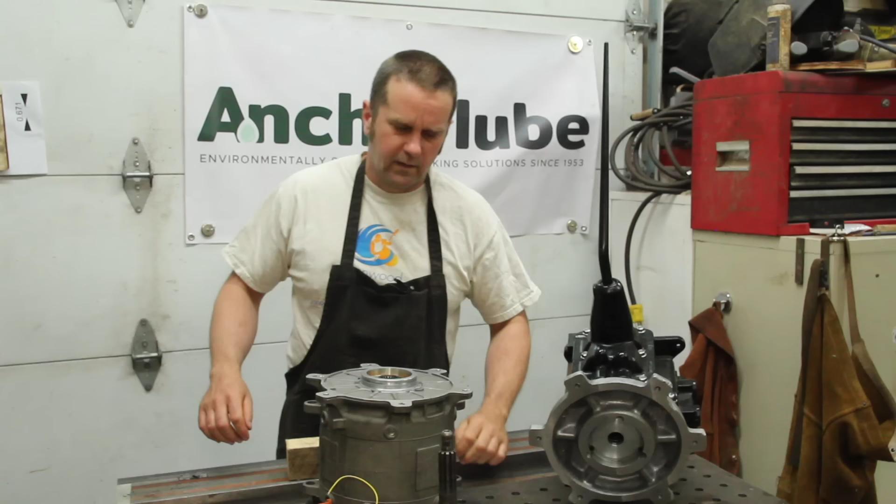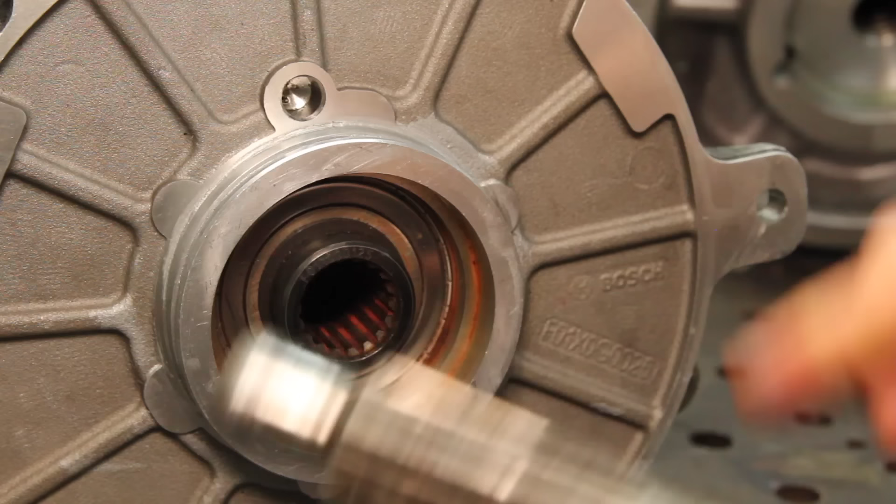And we are back working on attaching this electric smart car motor to that transmission from a 1956 Jeep CJ5. Last time I made the adapter plate. Today we're going to work on the input shaft. I need to make the input shaft fit the spline on the motor.

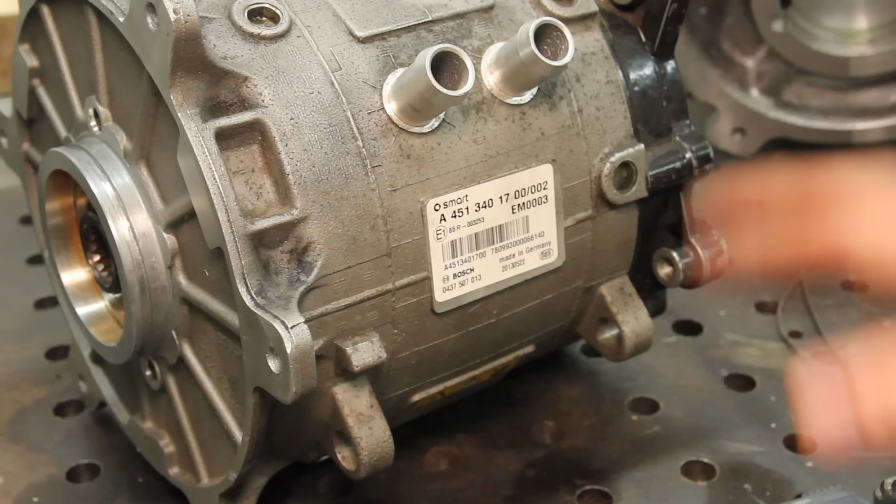It's close. This is a Bosch SMG 180-120. It's a kind of off-the-shelf motor that was used in a bunch of electric vehicles. Luckily, Bosch's marketing material specifies what this spline is. It's a DIN 5480-N 26 by 1.25 by 18 by 9H.

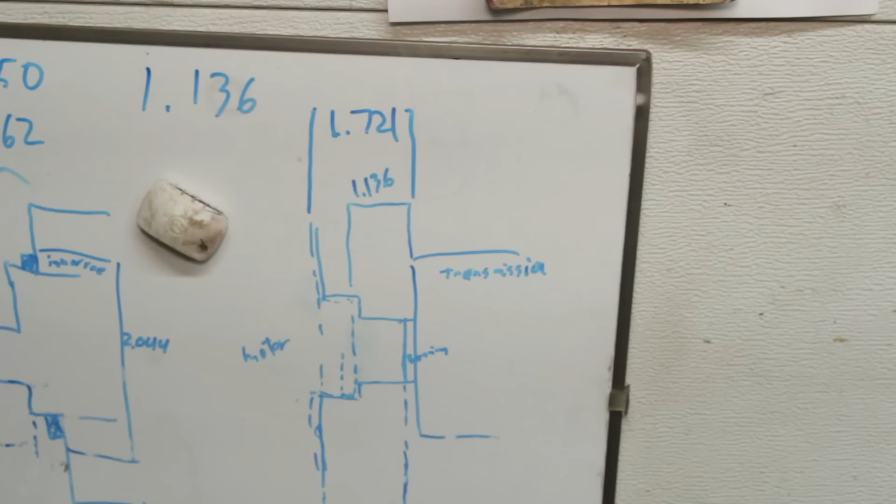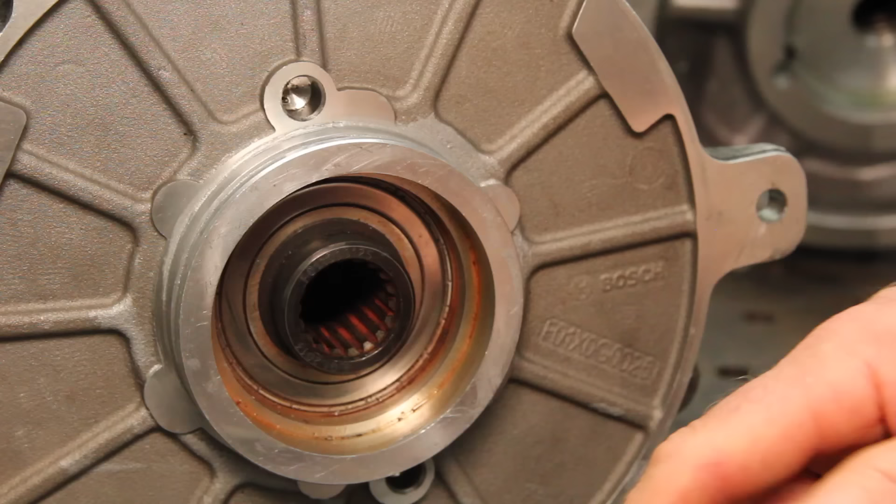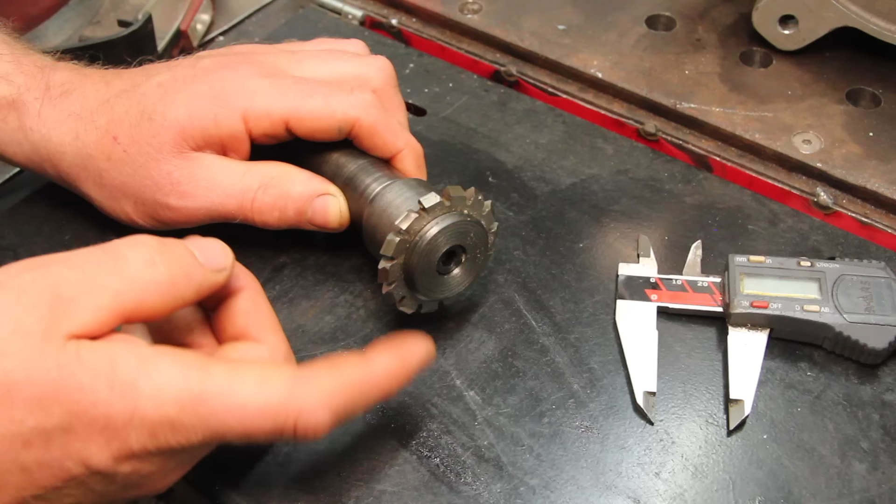I spent a while looking at the DIN 5480 standard, and what I found out was the N means Nabe, which is a hub or internal spline. That one's obvious. 26 is the reference diameter. 1.25 is the module, basically the size of the tooth. 18 is the spline count. I was able to source a 1.25 module, 18 tooth, 30 degree involute spline cutter straight from China, so at least I've got that taken care of.

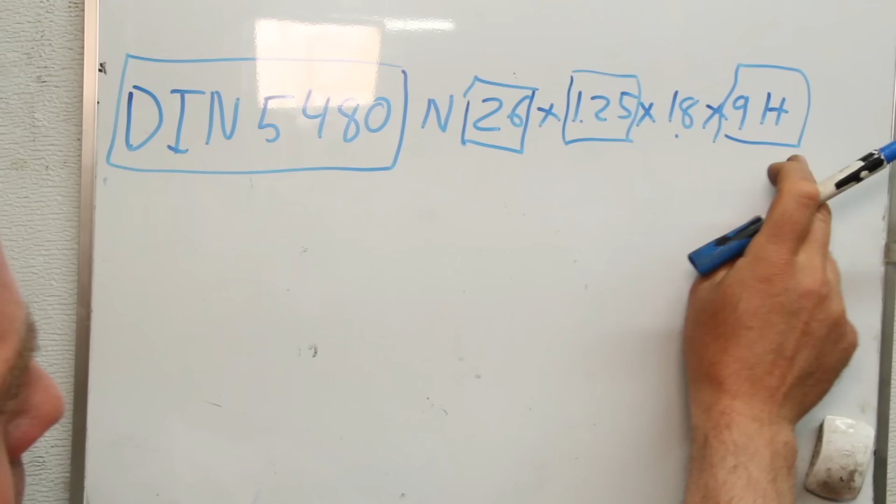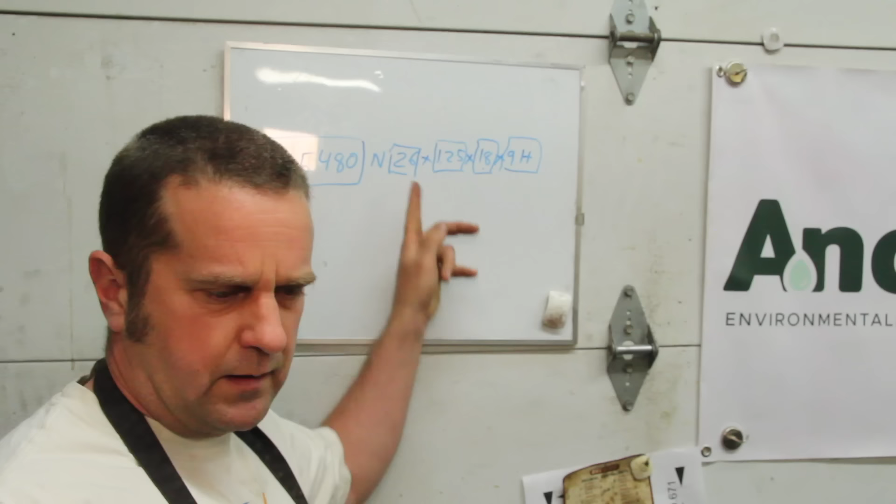And 9H is the tolerance or fit class. This one basically means we're going for sort of a line-on-line, very tight tolerance on it. But this one, I'm just going to read. DIN 5480 was structured to permit easy slip fitting of components, such as, for instance, ball or roller bearings. This condition is met by making the reference diameter equal to the bore of the bearing and then modifying the profiles of the teeth of the hub and shaft accordingly.

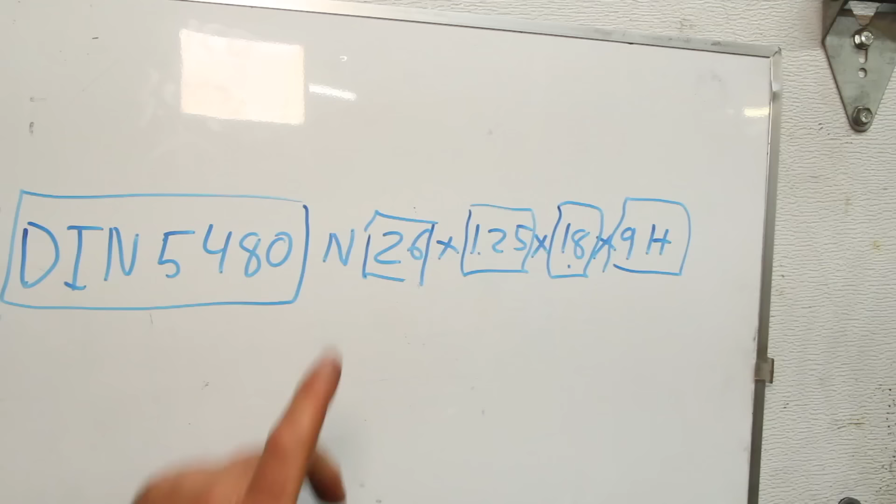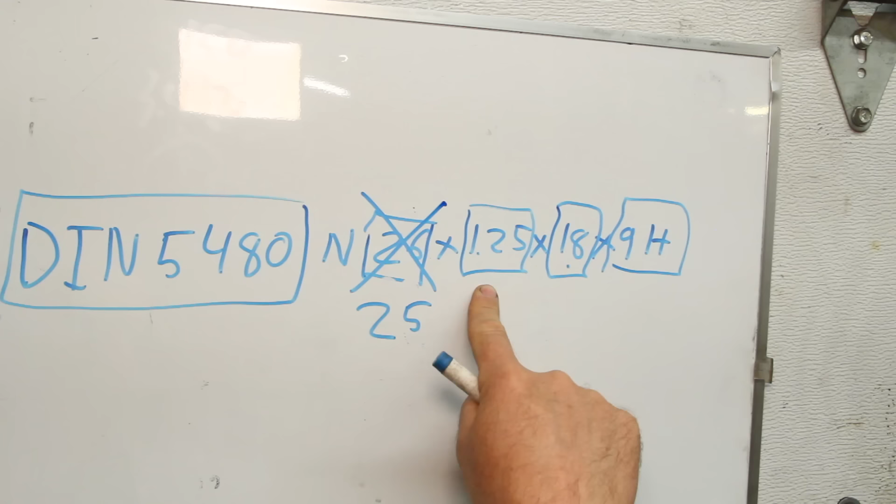Reference diameter is not the major or minor diameter of the spline. Really? On top of that, this is wrong. This is 25. If you look up a DIN 5480 spline chart for an 18-tooth 1.25 module spline, it's a reference diameter of 25 millimeters. So we're going to do what we always do, which is take some measurements, make a test piece, see how it fits, and adjust accordingly.

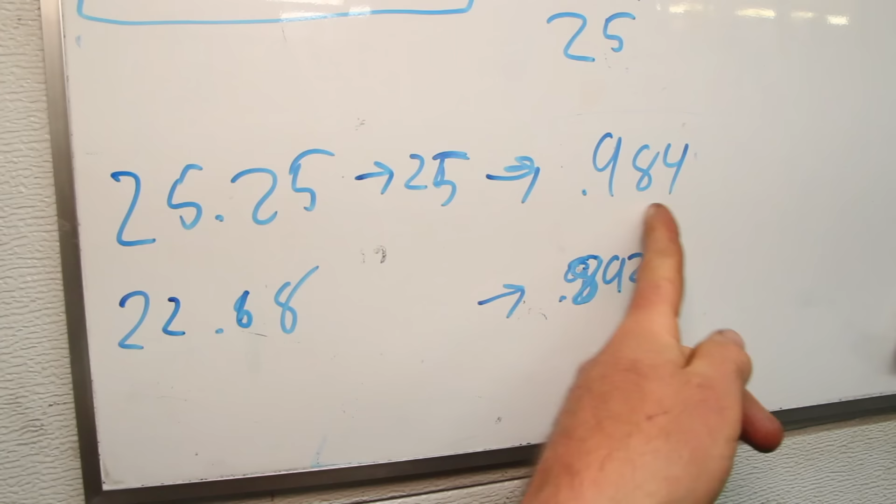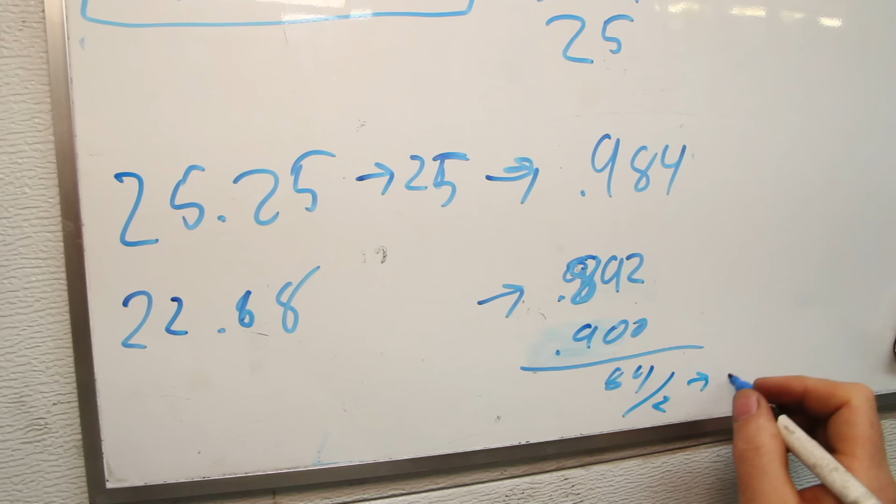Came up with a major diameter of 25.25 millimeters. For clearance, we'll call that 25 millimeters. That gives us 984 thousandths, because all my tools are in inches. Deal with it. Minor diameter, 22.68, 892 thousandths. We want a little bit of clearance on that, so let's call it 900. Tooth depth of 42. Seems like a good answer.

You know, it happens to me more than I care to admit that I take a roughing pass or even just an initial pass and hit the dimension exactly. It's better to be lucky than good.

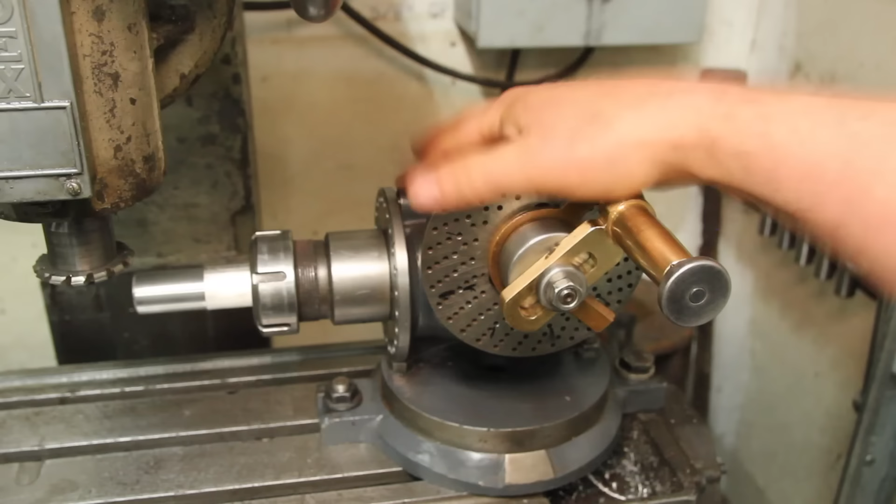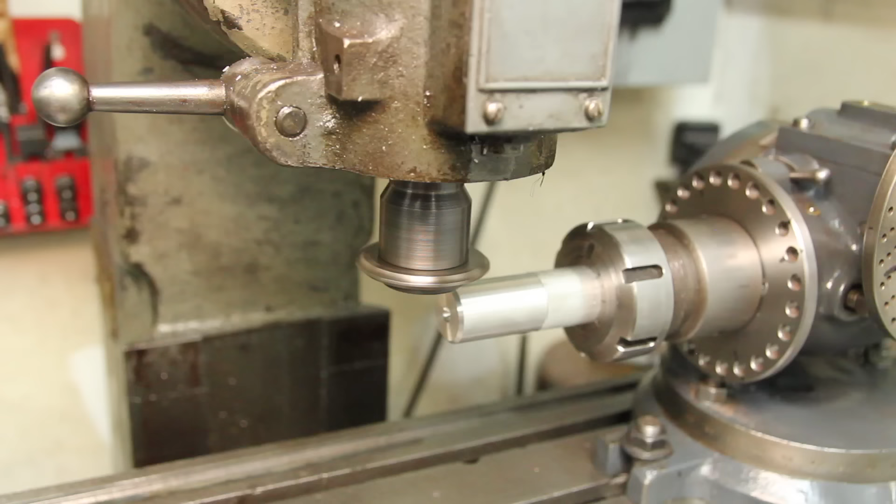I've got my dividing head all set up, clocked in vertically and side to side. Set up for 18 divisions. It'll be 2 turns and 6 holes on a 27-hole plate. I'm going to come down, touch off my cutter, then move halfway down and start cutting splines.

At the end of the last video I did on this project, I answered a few questions that I knew would come up, and some people asked them anyway. Maybe if I do it at the beginning this time, people won't wander off before they learn something. The most common one seems to be, why are you putting a transmission in an electric vehicle?

EVs don't have transmissions. The reality is most production EVs have a single-speed gearbox, a gear reduction usually between 8 and 10 to 1. I need a gear reduction, and it turns out I have one in the form of a transmission that's made to mate up with the rest of the drivetrain in this vehicle. This is a pretty well-proven way of doing an EV conversion. People have been doing this for a long time. I also plan on using this Jeep in a variety of terrain, so having the option of different gearing will be a positive.

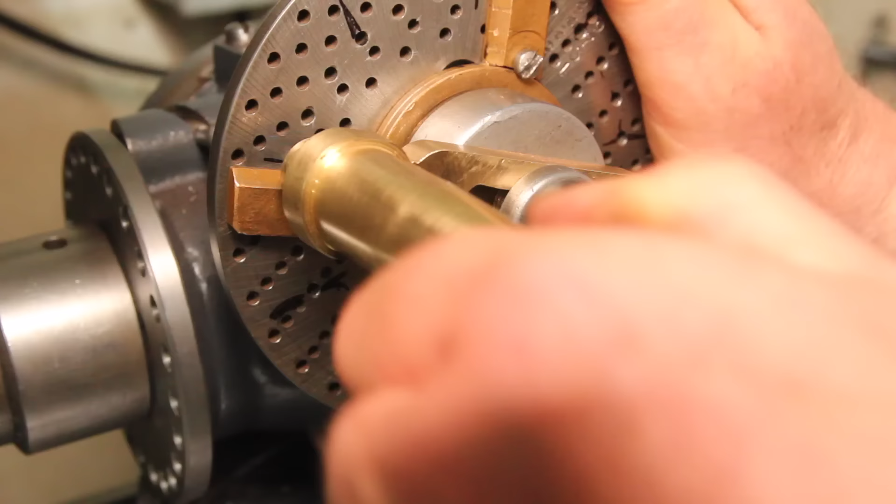The other one that comes up a lot is, how will you shift without a clutch? Most likely I'll just leave it in second most of the time. But because the rotating mass of the motor is so low, it should be possible to shift without the clutch anyway. I'll just need to give the synchros time to work, and maybe add a switch to turn off regeneration. Sort of a virtual clutch.

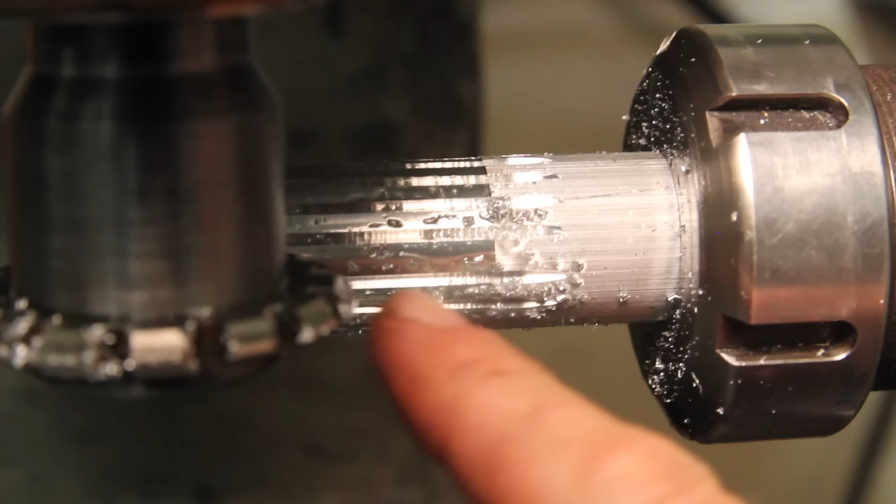Well, I made a mistake and didn't land back where I was supposed to. I'm going to go ahead and take this to final depth, just because it's a test piece. We'll see how it comes out. I'm going to keep this in the chuck for test fitting it and just pull the whole chuck off. That way if I want to come back and cut them deeper, I don't lose my indexing.

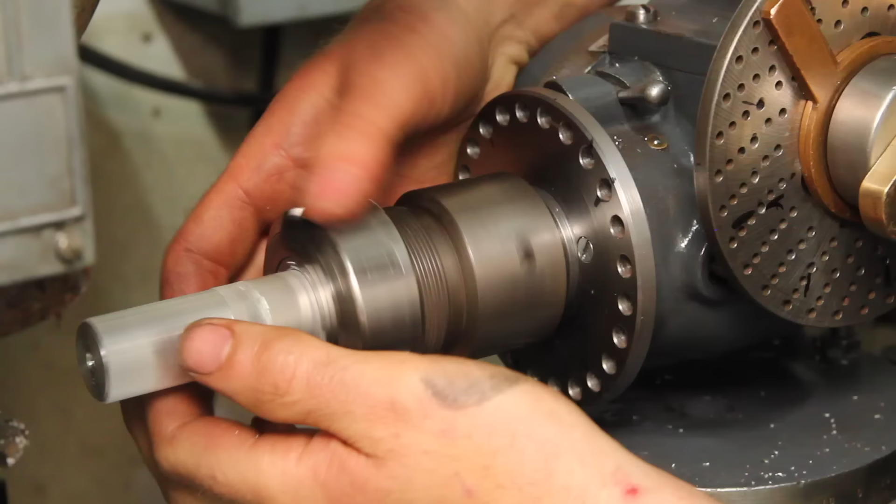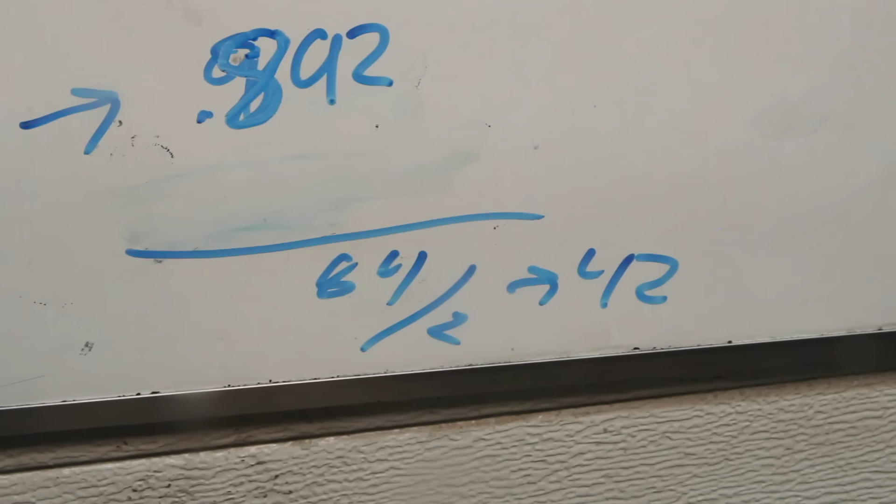Well, half of that looks really nice, but it is not even close to fitting. Right, and this clearance needs to go the other way. I am also not on center. I guess I'm just having trouble with math and counting today. That's why we make test pieces.

Went a few more rounds with that. Finally got it to fit in there. That's definitely not right though, so I made another one. And that one's not right either. So I made a third one, and that one is pretty darn close.

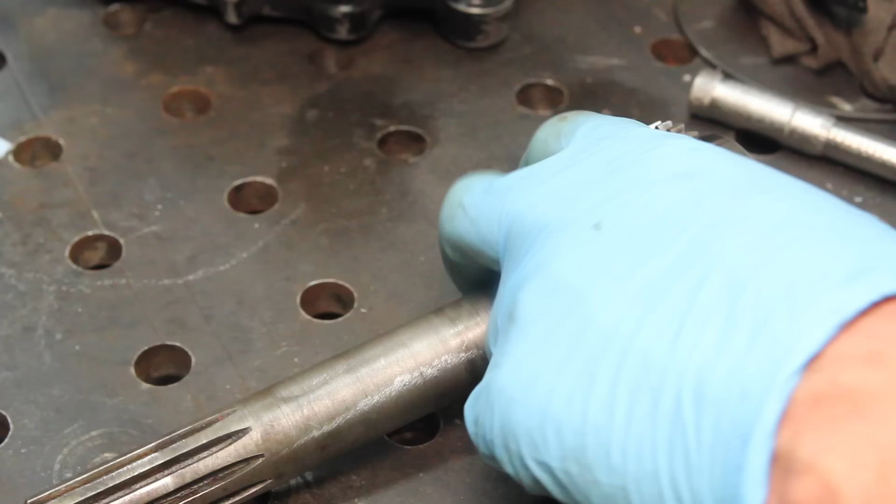So I made a fourth one, and that one fits really tight. So I think I've got numbers that I can work with and move on to the real shaft. I am going for an outer diameter of 892 thousandths. The problem I run into is the input shaft for a Borg-Warner T90A is 937 thousandths.

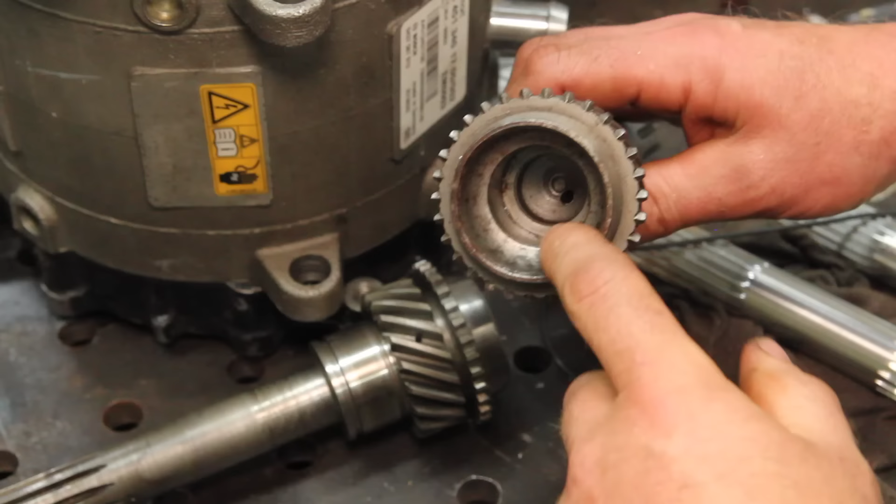But there's a solution to that, which is to use the input shaft from a T90J, which is 1.125", and the business end is the same on it. To maximize concentricity on this, I'd like to turn this between centers. I've got a center hole in this end, but there's not really one in this end, and this surface is a needle bearing race.

So, what was the other thing I wanted to rant about? Oh yeah, Lovejoy couplings. That's going to come up. It seems that if you have a vague idea of the existence of Lovejoy couplings, you feel the need to suggest them for any and all sorts of power transmission.

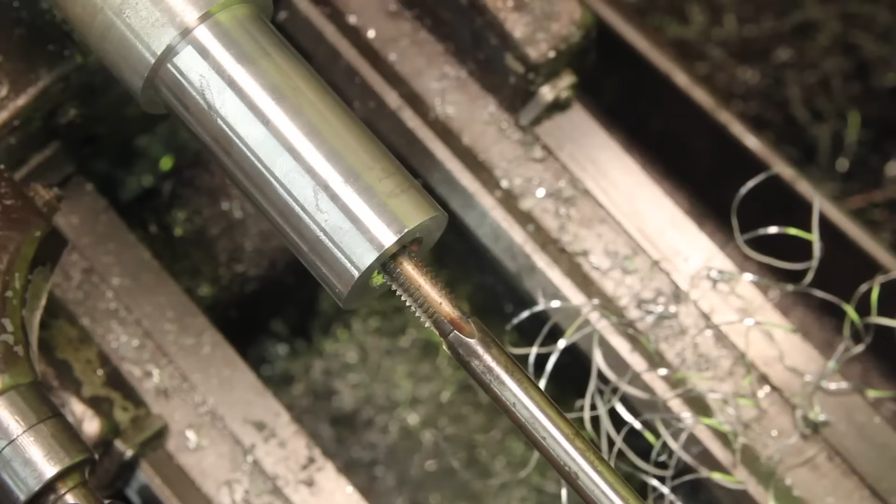Lovejoy couplings are great for dealing with misalignment in low torque applications, and they may even make them as an option for higher torque applications. But I haven't really looked into that because the people who do EV conversions say they cause more problems than they solve. They're also not used in commercial EVs. Instead, I'm going to take the approach to just try to maximize the concentricity in my machining. Oh, and I screwed up the press fit on this and had to make the part twice.

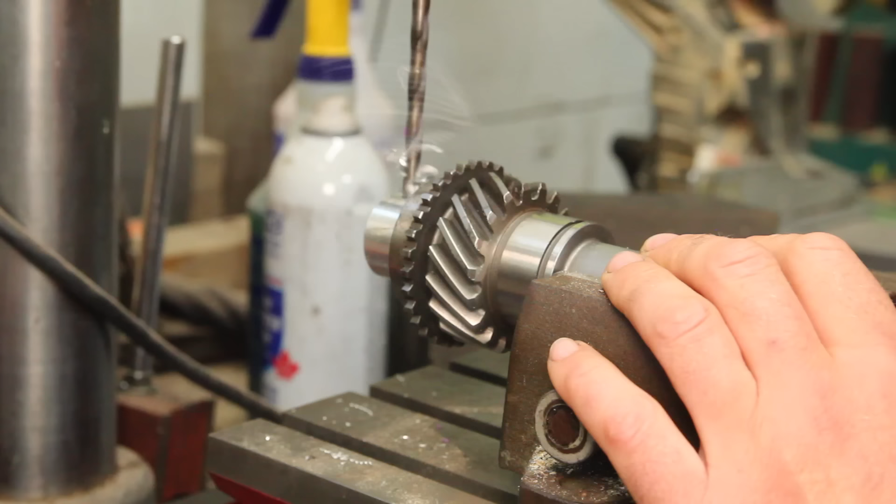I don't have a drive dog that's going to work for this on the lathe, so I'm going to use the set screw, and obviously I really don't want this coming out while I'm turning it, so we're going to use a little red thread locker on there. I also don't want it to push against that center, so just go in by hand. Do a quick check to see how that's running.

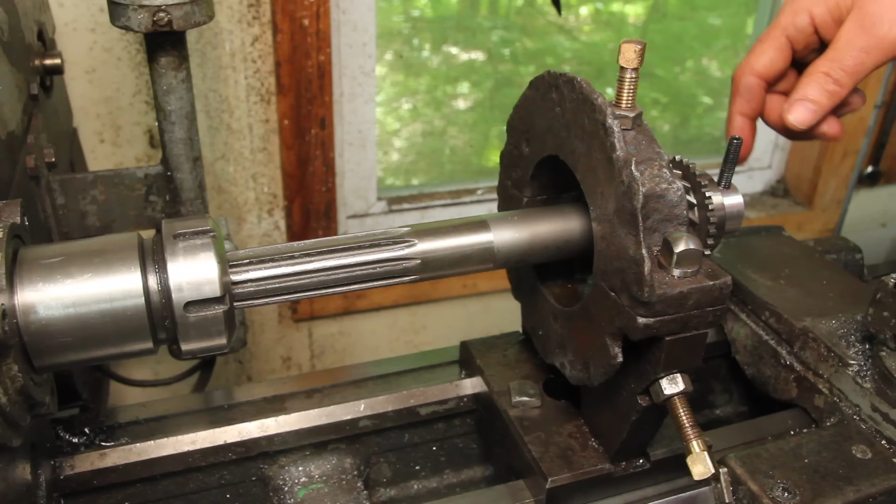Alright, I gotta come clean. I wasn't going to mention this, but last night I was playing around with trying to turn part of this, just pressure turning it between centers without the little dog pin in there, just to see how this cuts. And I spun this enough that now the center hole is kind of buggered up, so got the steady rest out, and I'm just going to rebore that center hole.

It occurred to me that since this setup is going to be more rigid, and there's a lot of the shaft I don't need, it makes sense to get rid of some of it now. This is also a good way to test to see how well this metal is going to cut.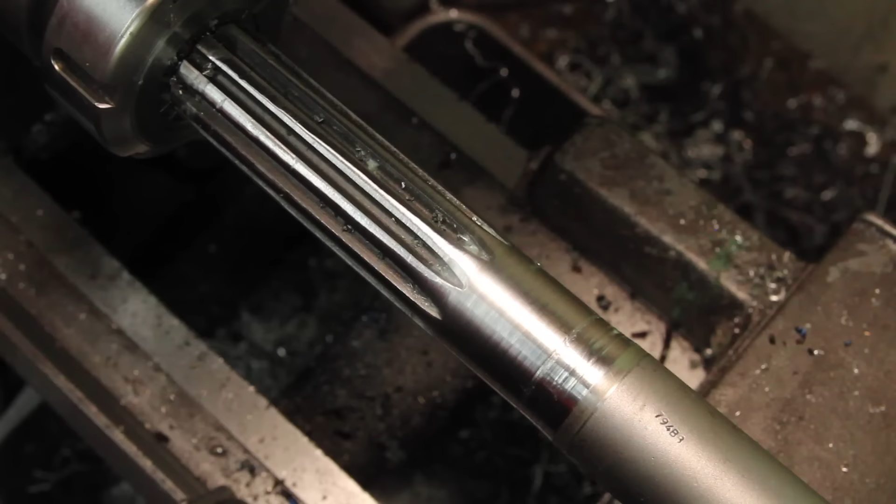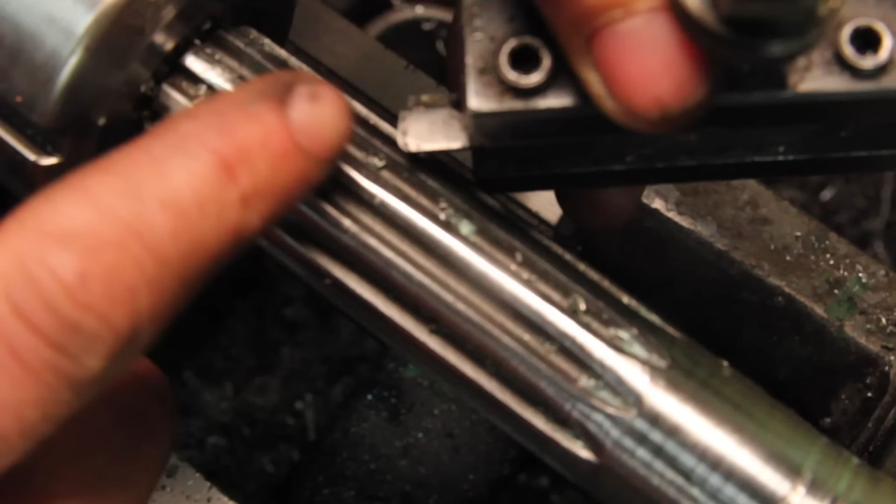So, those experiments reveal basically what I've been worrying about for the past several months, which is this part of the shaft is hard, and this part of the shaft is really hard. This section I can actually turn with carbide, and actually this is all that I really need of this. This spline section I could actually take some off with this brazed carbide tool, but it was dulling at every pass. I tried a piece of high-speed steel on this section,

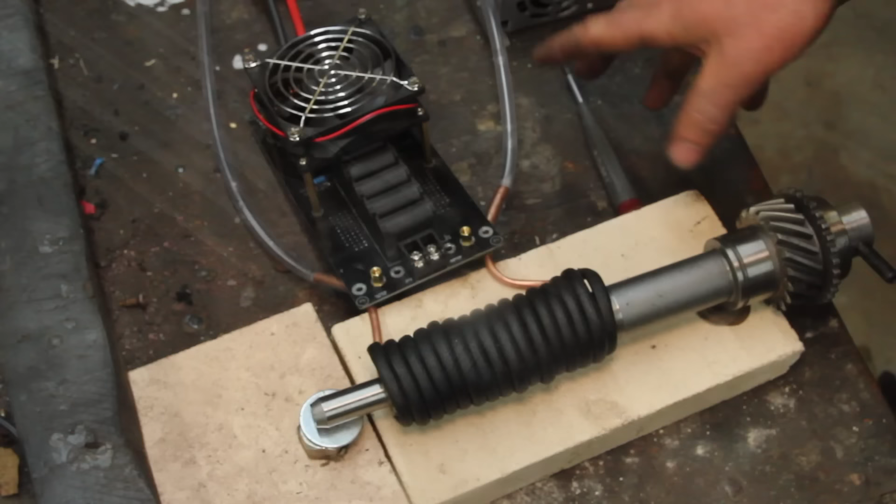and it didn't work. It dulled the tool and just kind of chewed it up a little bit, which means even if I do turn this down to the diameter I need with carbide, I won't be able to cut my splines in it. So, I guess it's time to anneal this. In one of my Patreon updates, I was talking about this problem, and one of my supporters there suggested using one of these little induction heaters.

Now, I shouldn't really have to say, do as I say, not as I do. This is not really the right way to set this up. I should have it in a nice enclosure and all that, but I'm still trying to figure this out. In reading up on these, one of the things that comes up a lot is they like to burn out, and that's because there's really nothing on the heater that controls the amperage, so you need to monitor it.

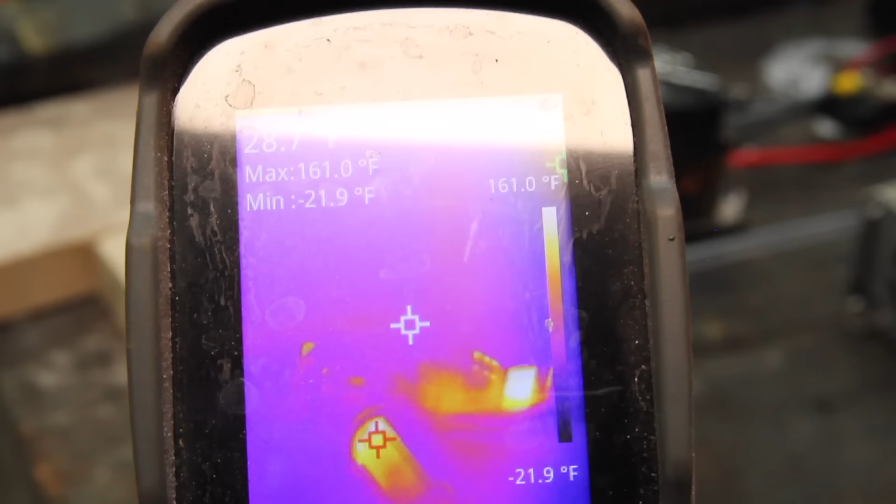So I have a little voltage and amperage monitor here. I've also just got a 5-gallon bucket with a submersible pump for cooling the coil. We'll see how this goes. Got out the thermal camera. Okay. Keeping an eye on the MOSFETs on the circuit board there, and also keeping an eye on the shaft. This might be asking a little too much of that little induction heater, but it definitely did something. Made it pretty colors. Let's see if we got the desired result.

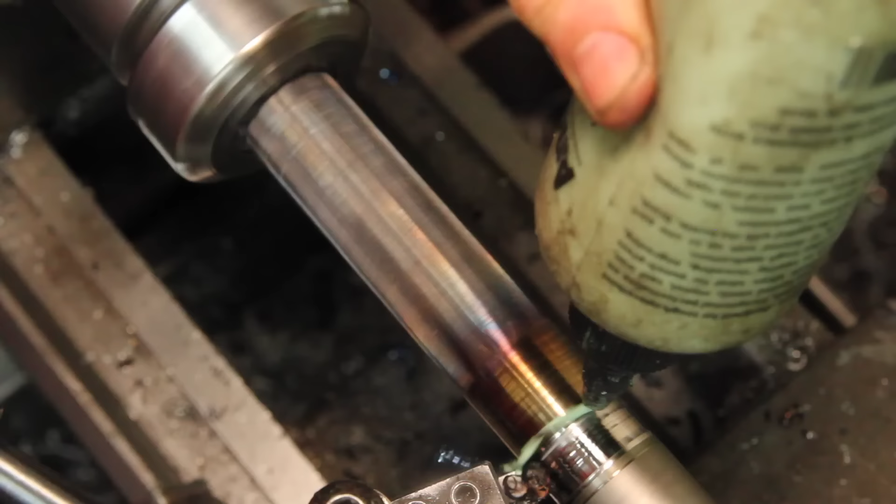The interrupted cut on the spline section was still really hard on the carbide tool, but I could cut it pretty well with high-speed steel. Well, I tried to anneal a little bit more of this with a smaller coil, and pretty much immediately burned up this MOSFET. We'll replace that at some point.

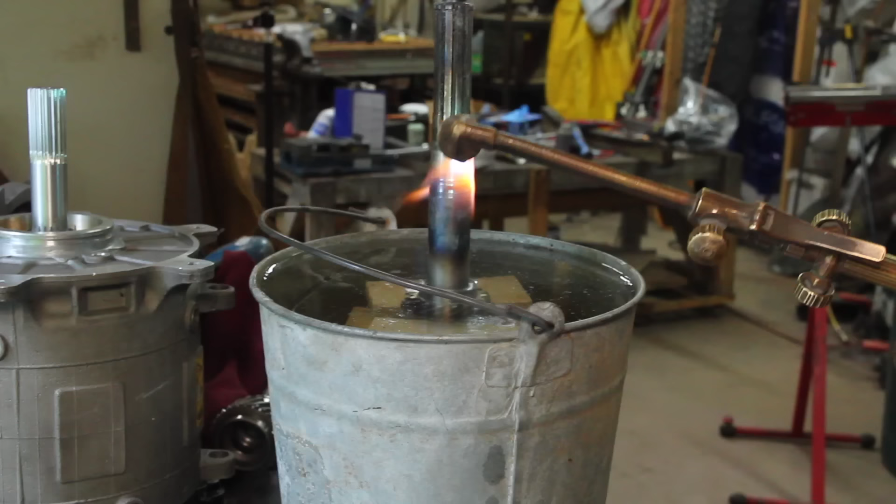Obviously, I don't understand how this works quite well enough yet, but what I do understand is the appeal of the induction heater is being able to closely control where the heat is applied. I don't want to anneal the part of this with the gears on it, but I can achieve that with a torch by keeping them submerged in a bucket of water.

I know sometimes when I change my approach mid-project, it might seem like I don't know what I'm doing or I'm making it up as I go, but the reality is that these are all things that I've thought through well in advance, and now I'm just kind of working through the list. I've got this to a point where I'm pretty confident I'll be able to cut those splines in it, and now I'm going to completely change my approach to this.

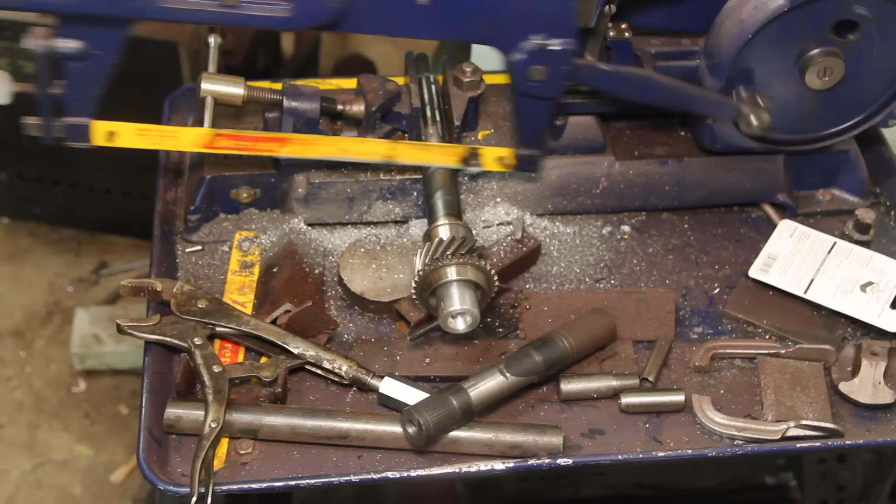If you're working through something like this and you haven't done it before, you need to be willing to adjust and adapt and go to plan B, C, or D as you go. There's a lot of that here. I wasn't happy how it was running on this center hole. I tried my best before, so I stuck this in the 4-jaw chuck, got it dialed in off that surface, and the best I could off this surface as well.

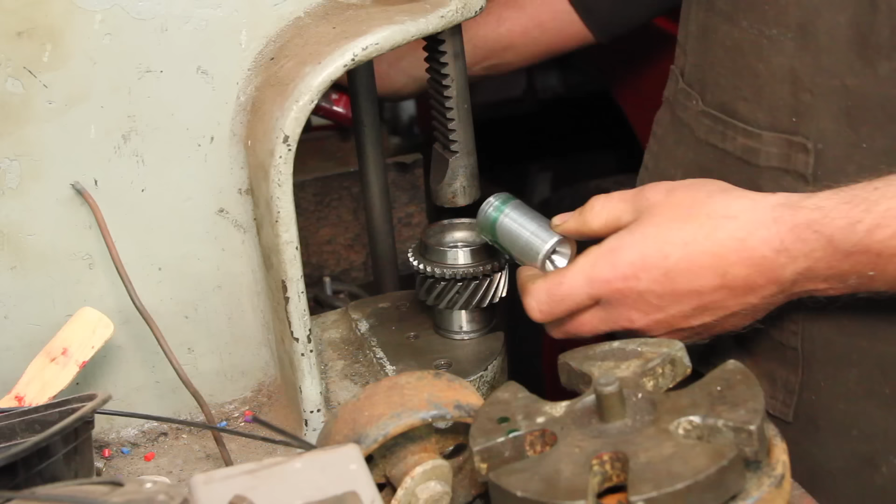I flipped this thing around, clocked it in again, tried to face it off, and then realized I really just don't have a good press fit on that. I really didn't want to Loctite this in, but I think it's going to be the best bet.

It's been a while trying different positions to try to get any runout in the setup to cancel out with any runout in the part, and I think I've got it about as good as I can get it. Since I got all of my mistakes out of the way on my test pieces, this time I'm doing a scratch pass first to make sure I've got my indexing right, and provide a visual confirmation on subsequent passes that I'm in the right spot.

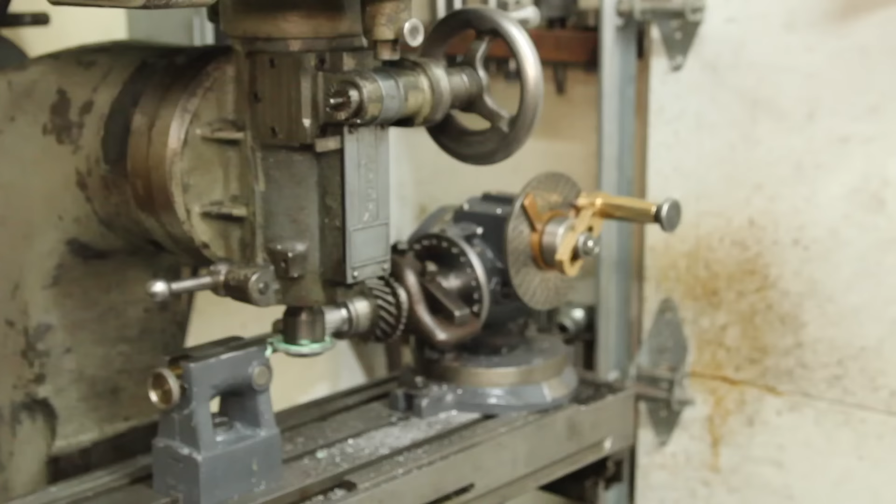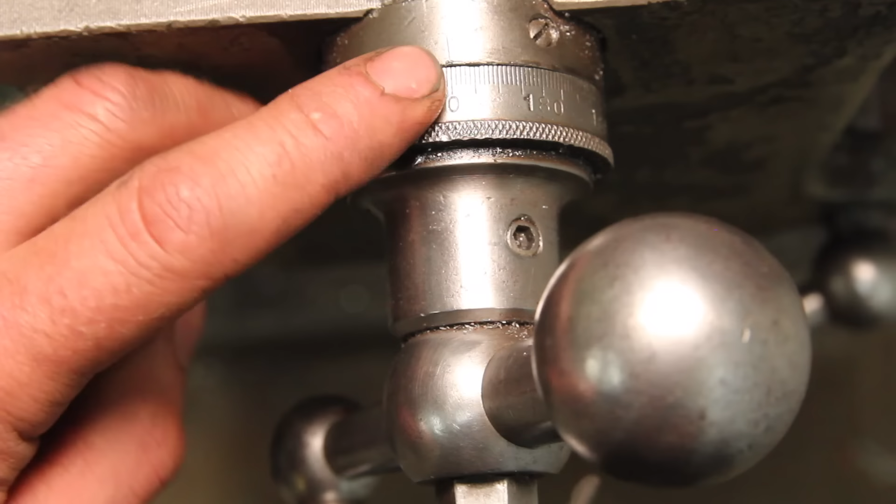When I made the test pieces, I zeroed this dial. I haven't touched it since, so that should be on dimension. Looking at that, I think it needs to go a little bit deeper, but I think it's time for a test fit. And just as predicted, it does not fit yet. It occurred to me I should do this the proper way and measure it over some pins. In this case, they're 1/8 inch end mills.

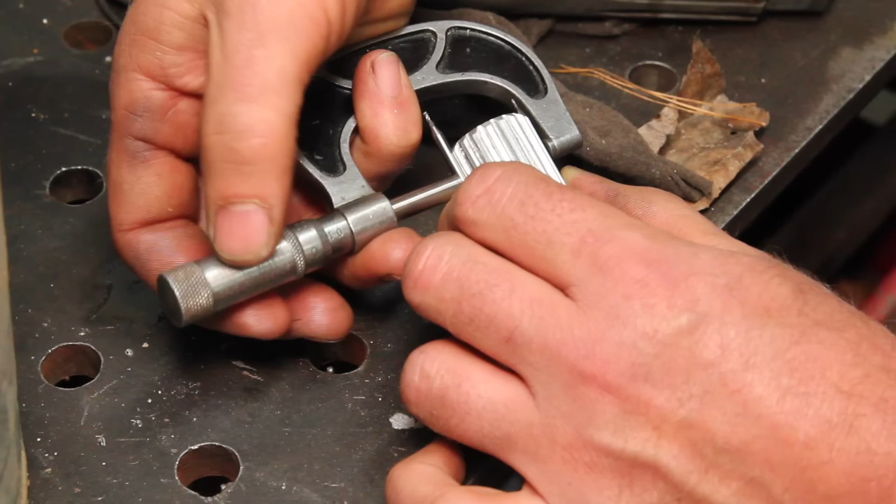Test piece is 1141. That one is 179. In theory, this setup should be repeatable, but given how things are going, I'm going to be a little careful with this first cut.

And because I annealed this, I now need to harden it. So back to the same bucket of water setup. The big problem here is I don't know what alloy this is, so I'm guessing at the process to get to a result that's also a bit of a guess. My first attempt I quenched in oil, but I wasn't happy with that, so for the second one I tried a water quench. That seemed to work better.

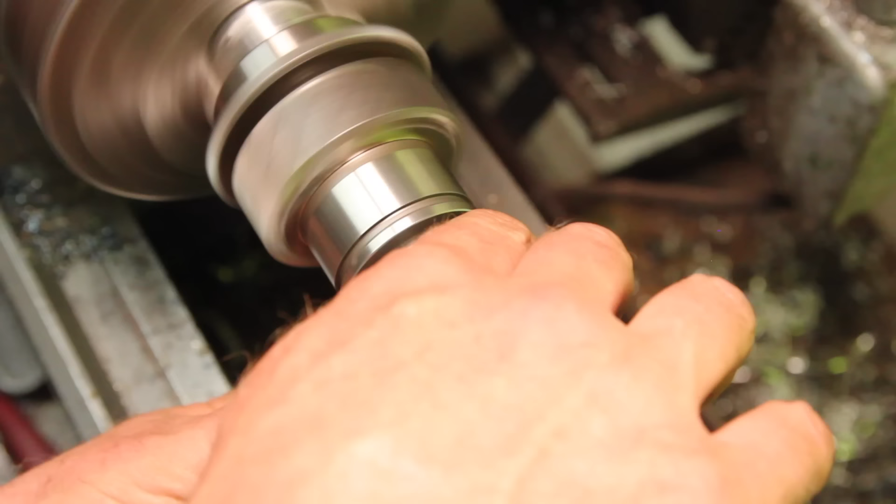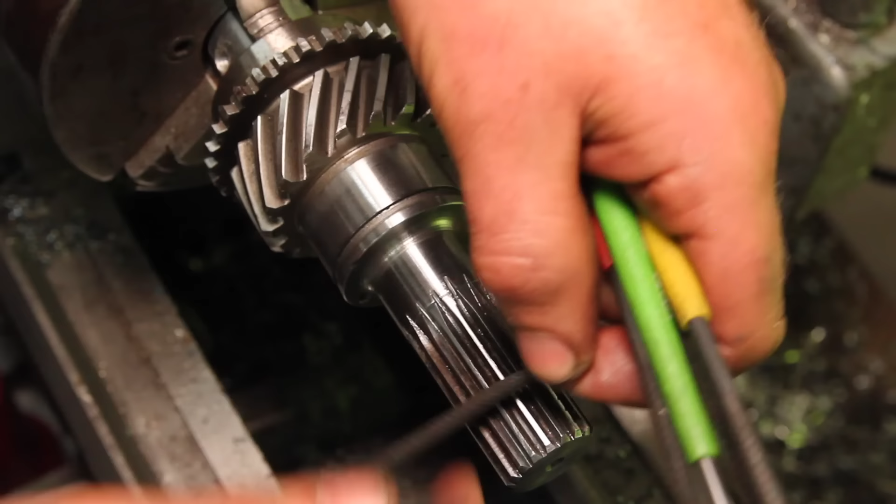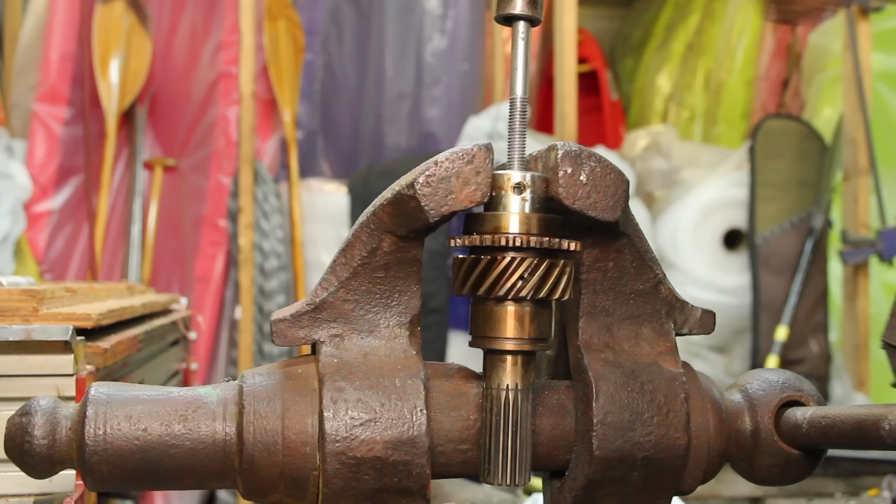Going after this with my hardness tester files. I've got to admit these files are something I struggle with. I just do not have the feel for them. I never know. It's probably, yeah, it's hard. I'm going to temper it for a little bit. I tempered this thing at 400 degrees for a couple of hours because that seemed like a good temperature. And while it was hot, I used the opportunity to drive out the piece of aluminum using the threads I'd tapped in it earlier.

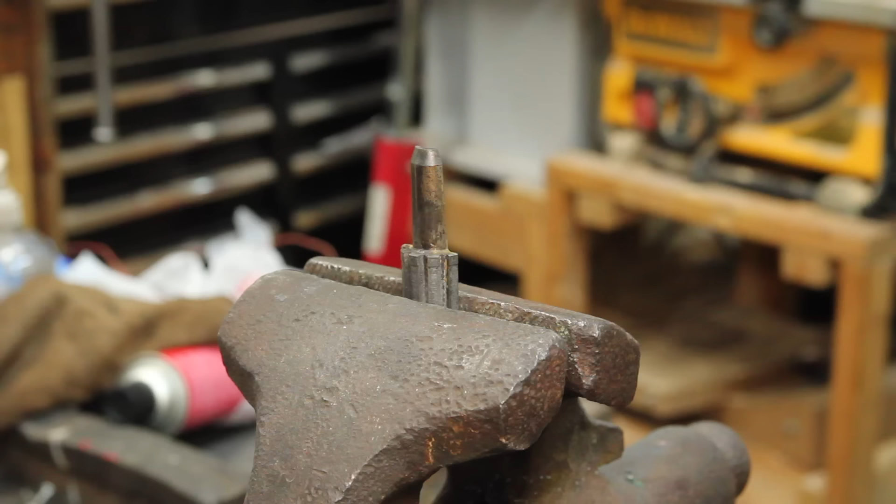So, did I harden that enough? Did I harden it too much? Did I temper it too much? I don't really know. It's not as hard as the original one. It seems like it's probably harder than the hub and the motor. I got some pretty good advice from Chirpy to take some of the scrap, make some sample pieces, heat treat them the same way, smack them with a hammer and see what happens.

This one's been hardened, but not tempered at all. It's exactly what I would expect to happen. And one that's been tempered about like the shaft. That obviously has a big stress riser where it's going to break. Let's try beating on this piece.

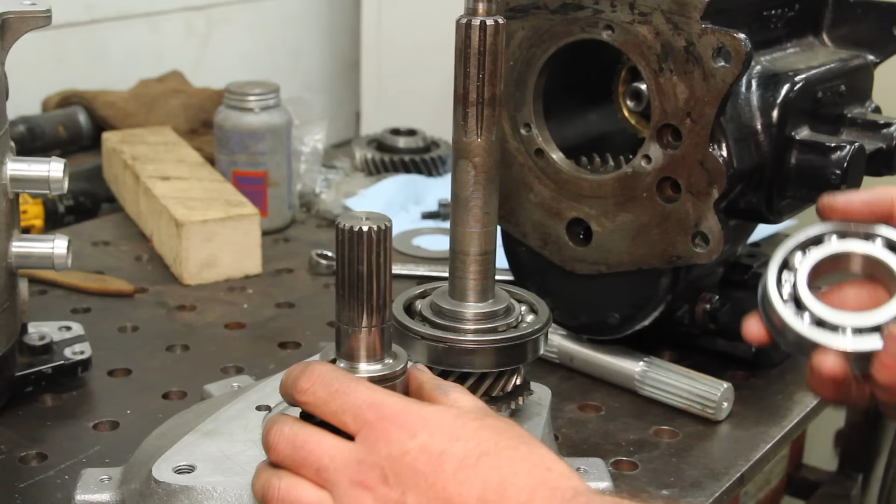So I think the thing to do is to put this all together and try to get this Jeep running, and it's either going to be fine or it's not, in which case I'll have learned something from it and I can go back and make a better one. I think I'm going to skip over most of the generic T90 reassembly because there are other better videos about that, and well, it would basically be you watching me watch that video. So I'll bring you back when I have this all together.

This is one of those things that, even though I know what's going to happen, no matter how many times I do this, it never gets old. This is a permanent magnet motor. Let's go first gear. Ha! Never gets old. The other good news here is everything feels like it's running smoothly and not binding up at all.

Went ahead, got the transfer case added on, all buttoned up. I'm real happy with how this is looking, and it's pretty much ready to go in the Jeep. So I think that's a good spot to leave off for this one.